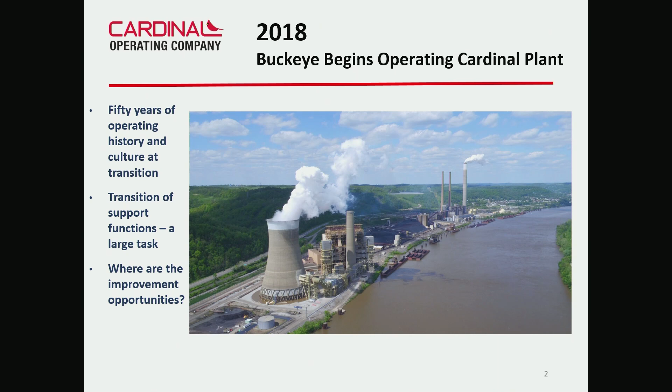So there have been a lot of changes since transition in 2018. Way too many to go into in the amount of time that we have here. So we're going to hit on a few topics and then leave some time for questions at the end.

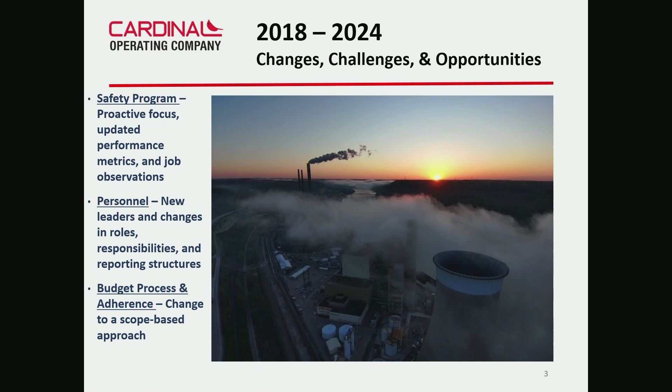We're going to talk about the Cardinal Safety Program and how it's changed, how the plant personnel and organization has changed since transition. We're going to talk about how we budget and budget adherence and how we think of that differently today than we did back at transition.

We'll talk about the Cardinal Byproduct Sales Program and the support organizations that I talked about, how much time we spent thinking and planning for those, and how that's changed, where the support comes from and how it's delivered to the plant.

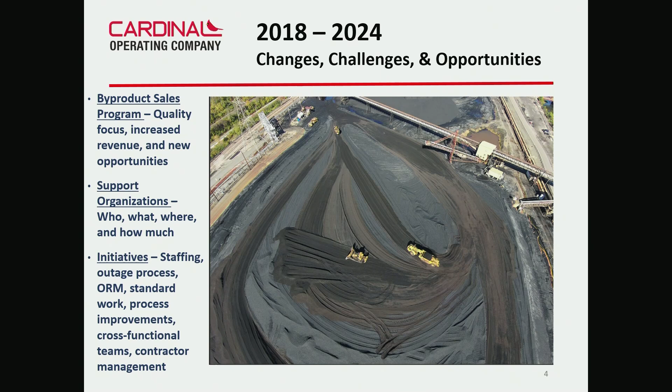We'll talk about some initiatives that are in place at the plant to continue to improve performance.

So we've had major projects completed since transition in 2018. We'll hit on a few of those. It's sort of changed the way the plant looks.

Then, of course, where the rubber meets the road is performance. We'll talk about reliability and how we're doing in that regard. And then also some thoughts about the future of Cardinal.

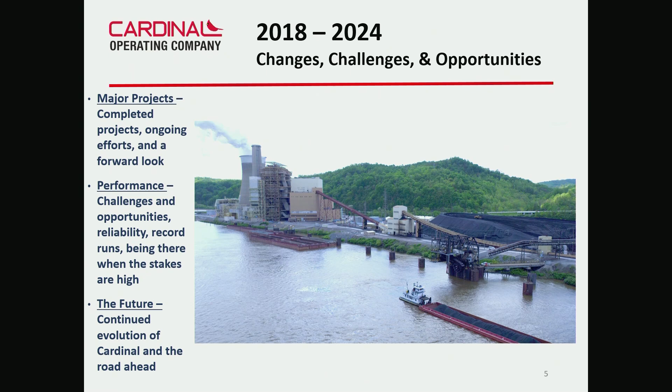So at Cardinal, we begin everything with safety, and we're going to start here today. I'll ask Bethany, you were an AEP employee, or a Cardinal employee before the transition. How do you look at the safety program today, and what did we inherit from AEP, and how's it changed?

Yeah, well, the safety program with AEP was very much a large safety program, and they did a great job of initiating that. But they had a large fleet of plants. They also had a large corporate structure that helped them out.

So when we transitioned with Buckeye, we didn't have that. So we did have to employ some outside resources. We hired a consultant, AmeriSafe, and they kind of assisted us along the way. We had to change a lot of our policies, review our policies, update our policies. So they did help us with that.

Another thing we tried to do is put more of a proactive focus on safety versus reactive. We talk about increased job observation, so we wanted to get our leaders out more in the field to do job observations, or high-risk walkdowns, watching employees or contractors doing work to see if there's anything better or safer they could be doing. That's helped, and we actually do those on a daily basis.

Another thing we've employed, as you can see on the screen, is this energy wheel. We got that from benchmarking another utility, and we've used it for about 1.5 years now. It's one of our new initiatives, but it's very simple and easy. You look at the different hazards the jobs can have, and during pre-job briefs, or even in our morning meeting, everyone talks about their high-risk jobs for the day, what part of the energy wheel, what type of hazards they could encounter, and how to mitigate those. It wasn't very high-tech, but it was a simple, clear initiative that's worked well for us.

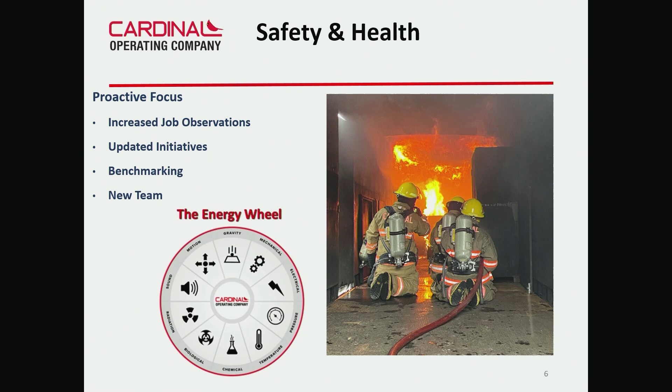Probably the last thing is that we got a new team in place for our safety, and they're working out really well. They get out in the field a lot, and we actually just hired one of our hourly employees to be one of our supervisors as well, which helps because he's been out in the field a lot and a lot of people respect and know him. He comes with some credibility, so to speak.

So you mentioned the new team. Bill and Eric are both new to the plant since transition. You were there for a year or so leading up to it. So talk to us about how the personnel have changed at the plant and also the organization.

Sure. So like Tom said earlier, at transition we did bring over all the employees - there were AEP employees from Cardinal. But since then, we did make some changes, some personnel changes. Eric and Bill obviously came, they came from the plant that I was at, Conesville plant. They came on board in 2019 and 2020.

We also made some changes interdepartmentally, I should say. I always say you got to get the right people on the bus, but you got to also get them in the right seats. So we needed to make some changes to get everyone on the same page and used to our business model as a new company.

We're a Buckeye now, we weren't AEP anymore. So we needed to know what kind of support we needed at the plant. There was a lot of discussion between what kind of support we needed at the corporate office versus what kind of support we needed locally at the facility. So some of the positions that used to be held at AEP corporate, we now brought to the plant, which we'll talk about shortly, because we thought that was a better fit and would help the plant better.

Thank you. Earlier I talked about inheriting a lot of processes and existing plant culture, and one of the things we inherited was a budget process that fairly quickly we realized wasn't what we wanted it to be. We wanted something more scope-driven and forward-looking, so we made some efforts to improve it. Bill, tell us a little bit about how the budgeting process, the planning process, has changed at Cardinal from what we inherited to what we have now.

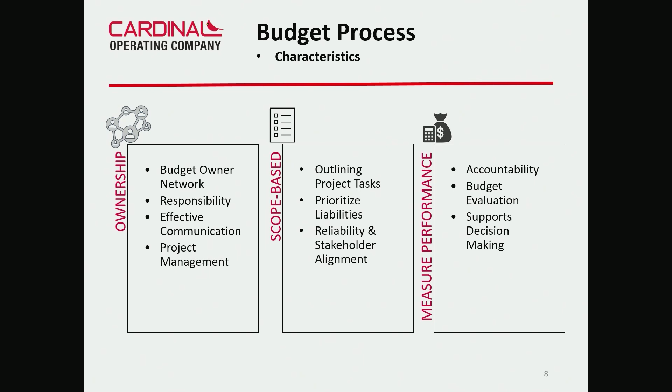Sure. So as Tom said, following transition, we created the process engineering group comprised mainly of on-site engineering. We assigned them specific equipment, and they assisted with work planning and the development of the O&M budget. This was a fairly new concept, not implemented at AEP, and we really think this new engineering group has helped us develop a scope-based budget at Cardinal.

This slide here shows kind of how we broke our budget out - three main buckets. The production side, that's Eric's operational day-to-day stuff. The maintenance side has a lot of buckets underneath it. Unplanned maintenance is that day-to-day work - your water pump goes out, a motor breaks, things we have to fix every day to keep the plant reliable and keep it running.

A couple outage buckets - the forced outage is when we come offline unplanned, it just happens, and we track that money to see what we're spending. Planned outage is some of our bigger, longer outages that we're planning out, spending a lot of money on to keep that plant reliable and try to run from outage to outage. Then you get into the capital side, that's some of the large projects we're going to talk about.

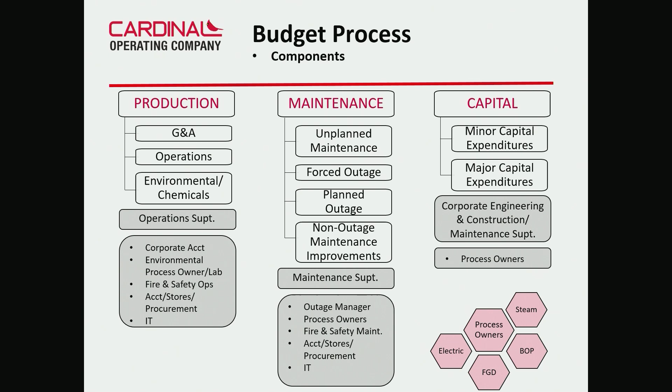That addresses some of the reliability issues we were having in '19 and '20. Also some of the major capital projects Nick's going to talk about later that we had to do to meet environmental rules and regulations.

Thanks, Bill. So byproduct sales is kind of a big thing at Cardinal and is becoming bigger. Eric, talk to us about our byproduct sales program and how that's changed over time. Sure thing, Tom. Thank you.

So byproducts - our product is, of course, the thing that you guys are all interested in, sending electricity down the wires. But when you're a coal-burning power plant, you end up with some stuff left over. So our goal is to try to make the best use of these things that are left over, instead of making it a cost to the plant and to all the members.

There's three big hitters to talk about when we're talking about byproducts at Cardinal Plant. Gypsum is the biggest one by far - it's used for wallboard or drywall production. Fly ash is kind of a new opportunity since transition, so we'll get into that a little bit too. And then bottom ash, which we've sold from Cardinal Plant for years and years, but it's a pretty small market.

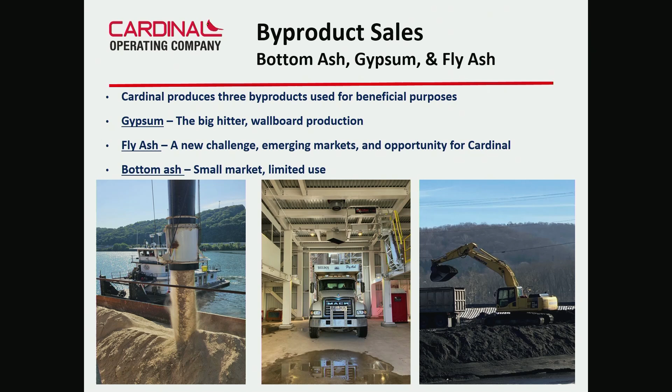It's a limited use case - they sell it to townships to put on the roads during the winter to help out there, but we're not going to spend a lot of time focusing on that because there's not a lot of sales involved there.

So gypsum is the big hitter. This is not something that existed at Cardinal Plant 30 years ago, and it's a product of the FGD process. FGD, flue gas desulfurization, that's the SO2 scrubbing of the boiler gases. We use this limestone reagent, mix it in our JBR reaction tanks that we have in all three units at Cardinal, and this is kind of what you get from that reaction, calcium sulfate.

So it's a slurry inside of the tank. It's got a lot of moisture in it, and basically what we do is run it through a dewatering process. You can see on the screen there, you've got a dewatering vacuum belt, that left-hand picture.

And then there's a lot of other stuff we have to do too. We got to move this stuff around the facility, so you can see some of the conveyors, some of the storage locations, the commercial dome for gypsum. That's where the stuff that ultimately we want to put on barges to send to the wallboard plant goes. And then we have the pile there that's kind of the off-spec pile. You can put good gypsum there if you run out of room in the dome, but stuff that maybe does not meet the quality standard for byproduct sales, at least for wallboard, may be placed there as well. So that's one final component.

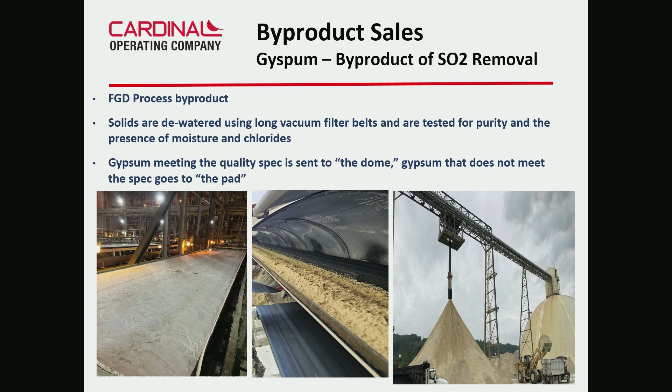Lots of testing involved in this stuff. We have contracts, we have specifications we have to keep up, and so we're doing this around the clock all the time. So how are we doing at this?

Well, look at this wonderful graph. This is net margin, I would call it, for gypsum handling. There's costs associated with the gypsum, and there's revenue we receive from selling it. You can see that those bars are getting bigger, which means we're getting a higher amount of revenue, and it's offsetting the cost to us and to all of you even more. And so 2023 was a record year.

We've got lots of wallboard production gypsum being shipped out. We're receiving a better price for it as of about midway through 2022, if memory serves. And why is this? Well, the market is starting to dry up, because of other coal-fired power plants going away. So our product is in more demand than it was before.

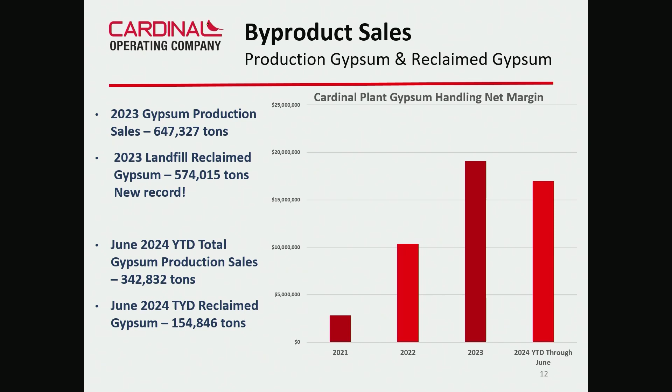Not only that, but we are digging this stuff out of our landfill. It's in such demand. We placed a lot of gypsum in that landfill over the years. Much of it was good quality gypsum, we just didn't have a market for it or a place to put it. Now we're actually digging it out of there, so we're making more room in the landfill and we're receiving revenue for that. Again, the bottom line is that's good for the plant and that's good for all your pocketbooks too.

Thanks, Eric. So yeah, gypsum handling is a pretty mature process at Cardinal. We began back in 2008 when the scrubbers were installed, but now we have another byproduct that's relatively new in fly ash. So how is that process working out and shaping up for us?

Sure. So the fly ash, as Tom mentioned, is kind of a new process. We commissioned these systems in 2021 and started sales of it in 2022. Fly ash is the ash that's generated, most of the ash generated in the boilers during the coal combustion process. We capture it, if you've been on the plant tour, in the electrostatic precipitators, removing that fly ash from the flue gas stream. And we're handling this dry now where it was wet sluiced in the past.

And the dry handling systems allow us the opportunity to sell it either as what they call conditioned ash, which has some water mixed into it - you can see a couple components of that system up on the screen there - and then actual dry ash that's unloaded into trucks and can be used for concrete production.

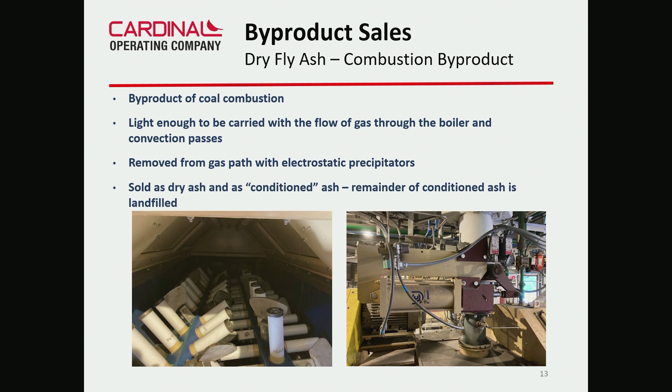We've got pulverizer rebuilds, boiler tuning, and so on and so forth. Everybody in the plant is really working towards that goal and paying closer attention to it than we ever have in the past.

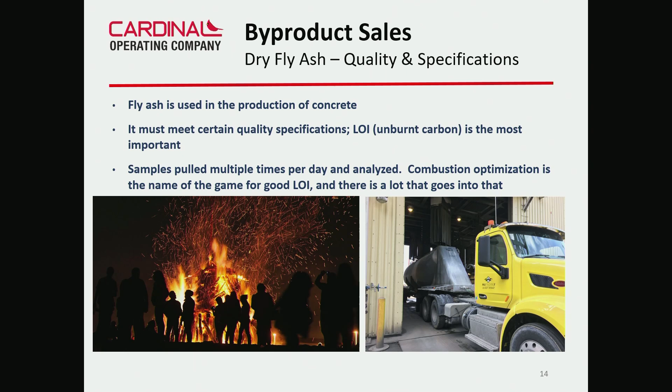In addition to that, you can see one of the dry trucks there. There's a lot of logistics going on to help shape that market up for how we can actually get rid of this ash. It's not like you just back your pickup up and take a load. We've got to develop that market too.

Yeah, Eric, so once ash quality became important with the conversion to dry handling in 2021, the plant's done a very good job of maintaining or increasing awareness of ash quality and producing a consistent product. But there's a market we need, so tell us about the fly ash market and how that's shaping up for Cardinal Ash.

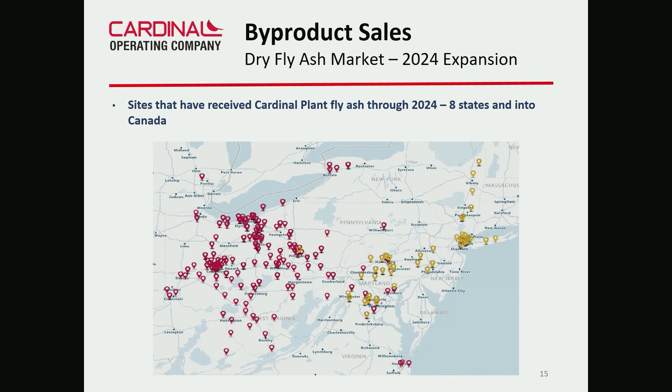And again, it's all a game of how much revenue can we receive for this ash that would otherwise be a cost to us and to all of you.

Yeah, thanks Eric. So let's switch topics for a minute here. Nick, I'll ask you to talk about the engineering organization, your organization, and how that's changed since transition in terms of how we support the plant with engineering.

Sure, thanks Tom. So after the transition, we really lacked corporate support for Cardinal, and so to compensate for the loss of AEP technical support...

We also retained a few plant engineers following the transition. We've leveraged their experience and expertise to help train the new engineers on site. And then when we lack the ability to do engineering on site, we hired third-party engineering support to do that for complex issues. We're also members of the Electric Power Research Institute, and we're focused on leveraging as much as we can from them. Any technical support they can provide, they really do a good job and help us out.

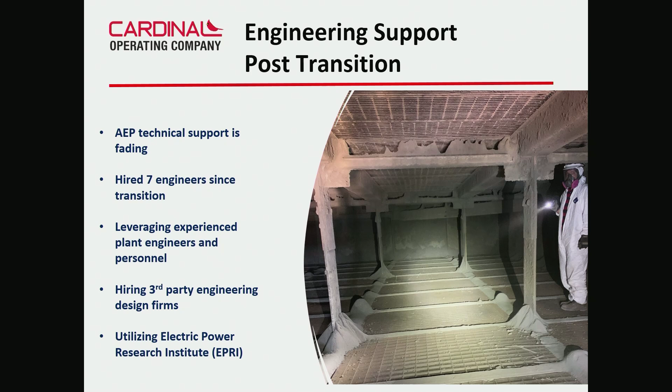Thanks, Nick. Clearly that's not an electrical engineer in the picture, is it? No, that's correct, yeah. Thanks.

About early 2022, we decided we wanted to put a team together called the Standard Work Team, and it basically consisted of one team leader and then 5 individuals that were solely working on standard work. What we mean by standard work is basically a step-by-step of how to do jobs.

They're all stored on our SharePoint site, and the Standard Work Team assists with that. We've dedicated some individuals to assist with certain departments, like one might have been helping with material handling, one with operations. We tried to get a vast array of people with different backgrounds, we have a maintenance person in there.

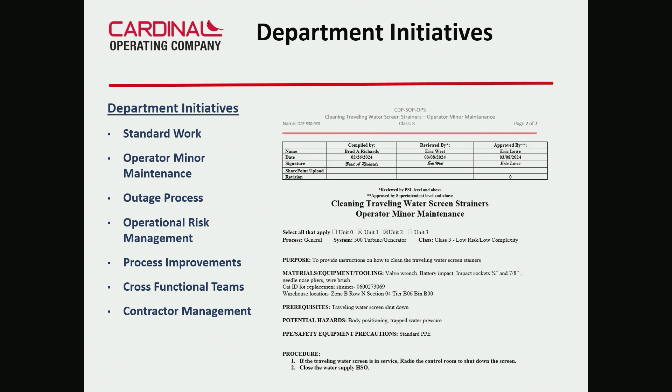The last one I wanted to touch on was contractor management. We are starting a new software called MyTrack. We have a lot of contractors on site during outage season, so we wanted to have a better handle on that. It's just underway now, rolling out probably this summer. We don't have too much information on that yet, but it looks to be a really great tool.

Thanks, Bethany. So there's a lot changing at the plant in terms of initiatives and process, organizational changes, but we've also made some investments in environmental compliance projects, and there's been some physical changes at the plant as well since transition. So Nick, tell us a little bit about some of the major projects we've completed for environmental compliance.

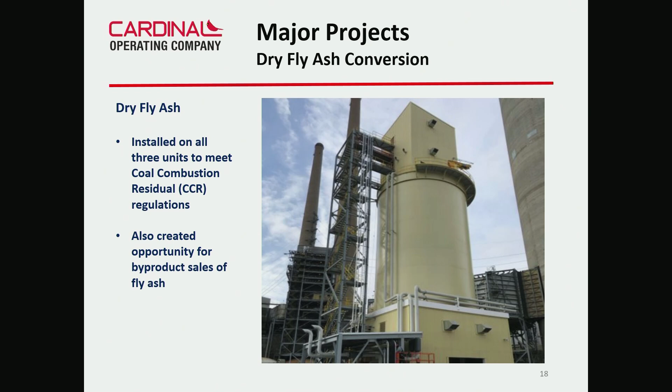Sure. So this project, the dry fly ash conversion, involved converting the handling of wet ash to dry ash. Wet system to a dry system is to meet the coal combustion residual rule. We send ash to the silo here, it's then dumped into trucks to be hauled off site and sold. This project was commissioned in 2021 and was a very large undertaking by Buckeye.

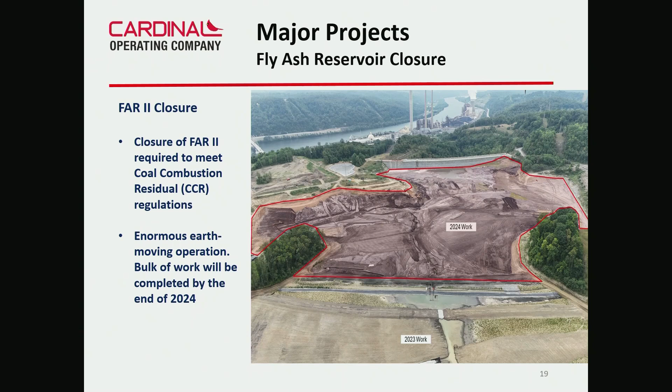The fly ash reservoir 2 stopped receiving ash when we completed the dry fly ash system in 2021. This is currently being dewatered right now, and then we're going to cap it with a synthetic liner, and then cover it with a natural grass layer.

And then to comply with the effluent limitation guidelines and the coal combustion residual rule, we also had to dewater our bottom ash pond, then line the bottom ash pond, repurpose it, and segregate it. One portion of the pond handles bottom ash, and that is a closed loop system, and then the other portion handles balance of plant drainage flows.

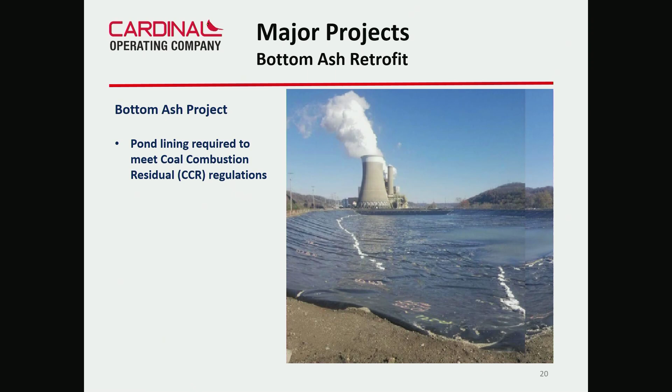So between those projects, I think over $100 million was spent for environmental compliance projects, new and closure of existing environmental liabilities. But we've also been investing money to maintain or improve plant reliability. Bill, talk a little bit about some of the reliability improvement projects we've taken on.

Reliability is one of our goals at the plant. We're trying to make it from our spring outage to our fall outage, and then from our fall outage back to our spring outage with as little forced outage as we can. So we plan for these larger spring outages and build projects for them.

In 2020, we were seeing some issues with the first vertical reheat stage on Unit 2, starting to get some tube leaks every couple weeks. We put a project together to replace that. Unit 1 was actually replaced in 2015, so Unit 2 was a little behind. In the picture, that's with all the elements cut off - the lower tubes are where the bundles go up. That section should look a little like what's to the left of that scaffold. So that's the work in progress, all cut out, getting ready to go back during one of our bigger outages.

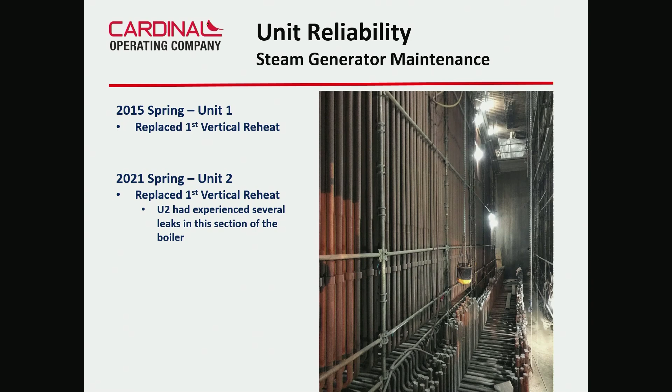So what we're looking at is actually inside the furnace at one of the units at Cardinal. This here's in the upper part of the main furnace.

We're doing some weld overlay. We had some tube leaks starting to bite us, and our forced outage rate in the main furnace was going up. So we brought a company in and did a scan of the internal boiler, rode a robot up and down the wall tubes, got thickness readings on them. We identified areas that needed work. On Unit 1 in 21, we put about 5,000 square feet of this weld overlay on, and on Unit 2 in 23, another 5,000 square feet. This Inconel overlay does two things: it gives us our wall thickness back on those tubes since we're high pressure, and it resists a lot of corrosion and erosion - Inconel has higher corrosion resistance. So it's building that wall thickness back up, and it's a lot cheaper than putting new tubes in and rebuilding the boiler. We did this in 21 and 23, and we've had pretty good success with tube leaks in the main furnace since then.

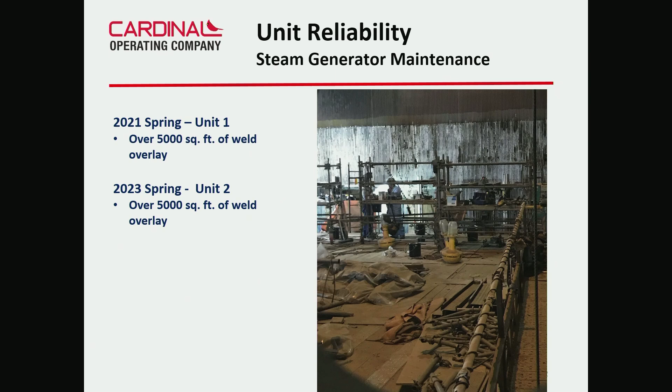This is something that got us about the same time. We were getting a lot of tube leaks up in the header attachments between the header and the penthouse roof, all the way around the boiler. What you're looking at here, that floor is actually the roof of the main furnace - we would have been below it in the previous picture. You see the windows that are cut out. You can't just remove all those tubes at one time because the boiler actually hangs off that, so we're cutting windows out, welding those tubes back in. We replaced all that on Unit 2 in 2021, and then in 2023 on Unit 1.

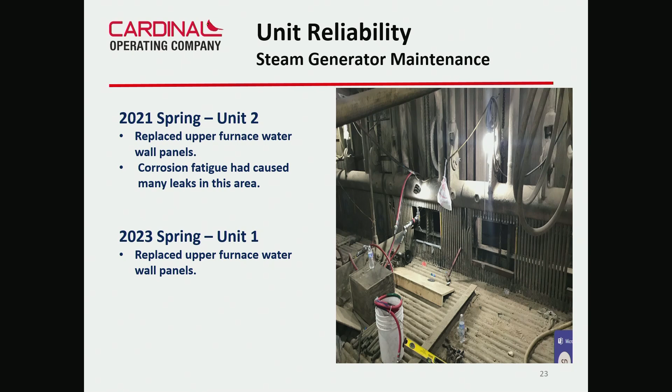So we've spent a lot of money, in summary, in the last 6.5 years since transition, maintaining environmental compliance and addressing reliability concerns. Eric, talk to us about what we've gotten out of that investment - how has the plant been performing?

Well, I'm happy to report that the data supports the conclusion that Cardinal Plant has been more reliable since transition. I see some familiar faces - some of you that were here last year may remember Bethany and I talked about our performance during Winter Storm Elliott and how Cardinal did during that time when so many others did not perform, and also some of the record runs we had on all 3 units and individual units. If you look at the table up on the screen, we've had a couple more really good runs since last summer when we talked to you. All of the darker blue shaded runs are over 100 days - these are the top individual unit runs since the FGD was installed, closing in on 20 years ago now. Those dark ones are all since the transition.

The 2 yellow ones up there are 2 new runs that have happened since we spoke to you last summer. Unit 2 had a very good run, kind of like what Bill was talking about earlier, where we ran basically all the way from fall until the spring outage - 157 days, just 2 days short of the run we had last year. Then we had another really good run recently on Unit 1, 103 days. That one didn't end the way we wanted it to - you do have some bumps in the road sometimes, but still, in historical perspective, 103 days is a really good run for any of the Cardinal units, including Cardinal Unit 1.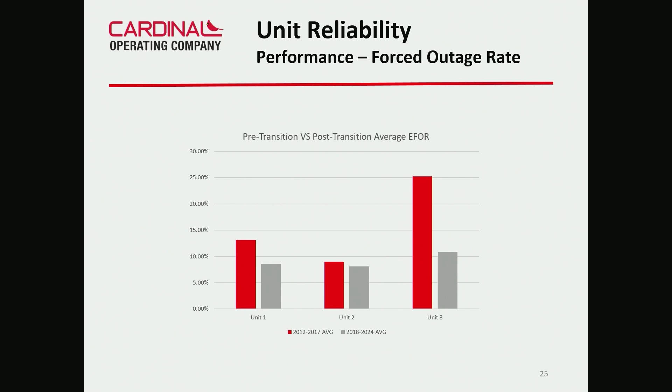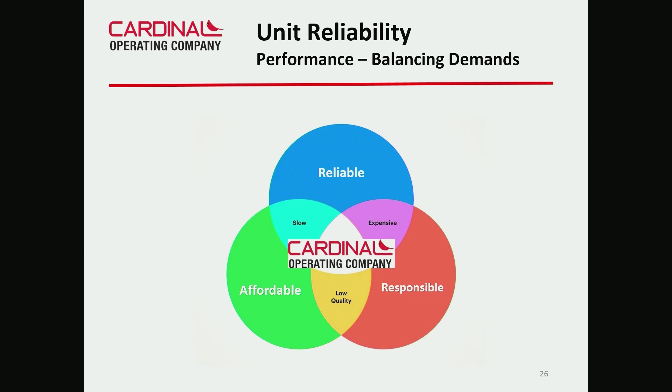So this slide, we think, sums up what we've talked about and what we try to do at Cardinal every day. We need to be a provider of affordable electricity. We need to be environmentally responsible. We need to be reliable. Sometimes it's hard to balance all of those things, but that's what we work to do every day - that's our mission. Some would say that's very difficult, there's trade-offs, and we recognize that, but that's what we work toward every day.

So we're working to maintain a balance of environmentally responsible, affordable, and reliable electricity. But we're also thinking about the challenges in front of us. So I'll ask our panel to briefly touch on a few of these challenges that we see going forward.

Sure, so the first bullet talks about the 2-unit operation. At the end of 2028, we'll be retiring our Unit 3, and we'll be operating with Units 1 and 2. So we at the plant are trying to prepare for that now - we need to look at staffing, how the departments are organized, manpower levels. That's definitely on the forefront, and we're looking at it now because it'll be here before you know it. So we need to start planning for that now.

Yes, and we also want to continue to build a culture out at Cardinal. We have quite a few younger engineers out at Cardinal, and we foresee Cardinal being around for a long time. We want to retain these younger engineers and help develop them. We think a strong culture will help do that, because they're going to be the future leaders out at Cardinal. We also are going to have some more environmental projects.

So we actually just broke ground on one for complying with the 2020 ELG rule. We're going to be adding a biological treatment system to our existing FGD wastewater treatment system. That system is going to be installed over the course of the next year and will be operational no later than the end of next year.

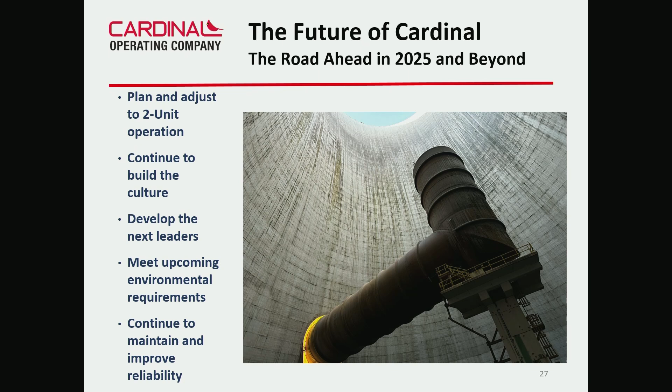Everything we continue to do is maintain reliability and the budget - it's a struggle both ways. You're trying to increase reliability but maintain a flat budget. So we continue to work on that, develop the culture at Cardinal, and just get better every day.

Thank you, so that kind of concludes our prepared remarks today. We wanted to finish with a slide of some of the folks at Cardinal that helped make everything possible. It's a team effort, both at the plant and at OEC in Columbus, at Buckeye's office, and support services that help Cardinal be successful and continue to get better.

So we do have some time left. If there are questions, we'd be happy to take them.

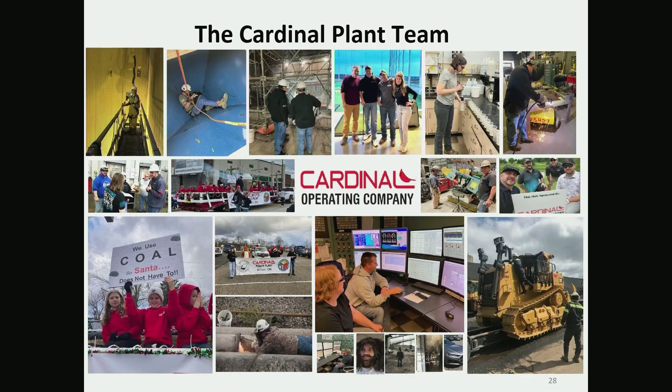Yes, Matt - yeah, just wondering if you can talk a little bit about the feasibility, or probably lack of feasibility, of carbon capture at Cardinal, and then also feasibility of converting to, say, gas, if we're forced with either one of those options at some point.

Okay, sure. Carbon capture for a plant the size of Cardinal has never been done anywhere, so that's a major problem. There's a co-op, GRE, working toward that - for a unit like one Cardinal unit, say Unit 1 or 2, their projected cost is close to $2 billion, and it's not going to capture the 90% that the rule presently out there requires.

If we're able to capture it, the geology in the area near Cardinal is not going to allow us to just put it in the ground there, like they can up in the north central plains. So there needs to be a pipeline or somewhere to take it, and that's equally infeasible, I would say. In addition to the capture problem, then you've got to take it somewhere.

Converting to gas, that's more feasible. I don't know if it's economical. There is gas in the area, and we're studying what it would cost to get gas to the plant. But what you'd end up with is a relatively inefficient unit running on gas, when compared to a combined cycle unit, which would be much more efficient — in terms of 60% or so of the fuel per kilowatt hour needed for a combined cycle versus converting Cardinal to gas.